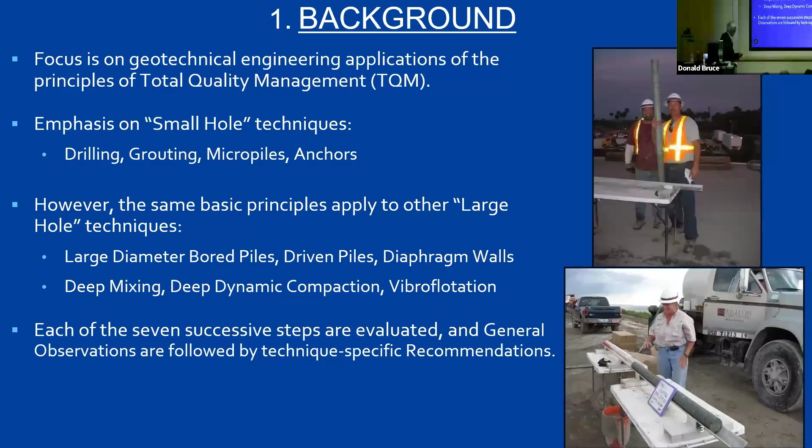That would be helpful. So what do we really mean by quality? Capital letters. Quality assurance and quality control is an integral part of every product, every project. And many of you here will have spent time in the field doing your tests and writing the results and all these things. That's one aspect of quality. But it's certainly not limited to that, important though it is. What quality really is synonymous with is ensuring that every successive phase of a project, God bless you, from concept to final performance verification, is focused on achieving the mutual goals of all the parties.

Again, going back to our Latin roots, the word contract comes from 2 Latin words, contrahere, which means to pull together. So a contract is a pulling together. But so often a contract is something that pushes us apart. So we have to try and change that attitude as well.

There are 2 fundamental aspects of TQM. Focused on optimizing every successive step or process. That's the key thing. It's all about the process. Because once something is built, like this clicker here, I can't inspect quality into it. What I can do is every step in the way of producing this is done to the highest standard of quality. And then the key thing, especially for the contractors, is to eliminate and avoid rework, i.e. do it right the first time. And that may sound very simple and very pedantic, but that is the essence of quality in the construction business.

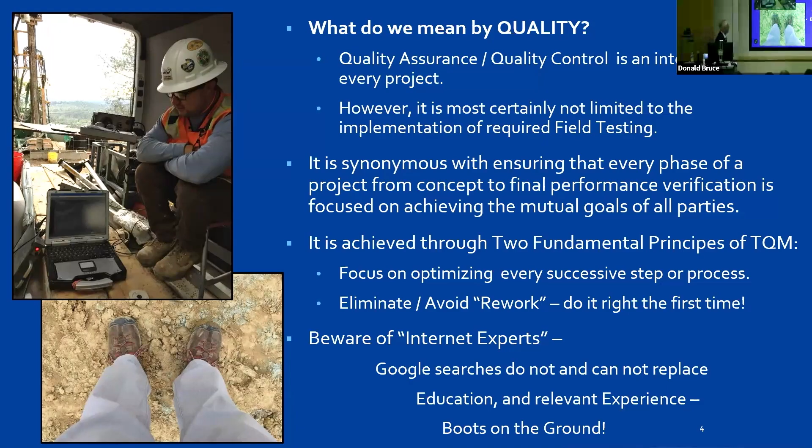That is essential. So let's start at the beginning, the design. Let's assume that we're all on a design team. General observations. Any design, it must be constructible.

That's the first rule of life. You can't design something that you can't build. It's got to be cost effective. Sure, it would be nice to diamond drill every hole on a micropile site, but you're never going to get the job to fly because it's going to be too expensive. So you have to be aware in your design of the cost implications.

It's always got to be compliant with the prevailing codes, standards, and recommendations. You can't just do this off your back. You have to have what we call a referenceable standard of care. That's to guide you in your work and then defend you if, God forbid, something were to go wrong. First attorney is going to say, so what code did you use in designing this bridge? And if you say, well, talk to the dog, and dog said, probably looked like this, that's not going to fly. So the designer must be experienced or extremely knowledgeable, preferably both, in the techniques that are being considered.

Very important. It's a bit chicken and egg, because you've got to get experience by doing a project the first time. But the way to do that is to do it under close supervision of your mentor or your professor. That's the way to get started on this. We have a process in our industry called internal and external peer review, either by an individual on the one hand or a panel of people on the other. And so when we develop the design initially, it's really important to run it past people who are independent of your design process. Now, they can be from within the organization or they can be from outside. But at this stage, it's a really important touchstone to have that peer review done.

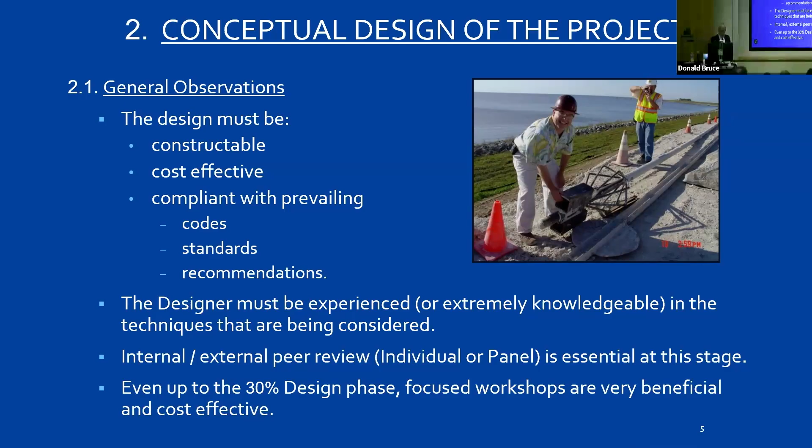And as you all know, a design progresses in stages. And a 30% design phase is typically very critical, because that's when really it's a go or a no-go, quite frankly. So at this point, industry finds that focused workshops are very beneficial. So you might have the designer, his supervisor, the owner, perhaps, and certainly the peer review together for a day or a week, going through the nuts and bolts of the design, just to make sure that it is relevant and cost effective. That is money very well spent.

So specific recommendations. Remember, that was a general commentary, and now we're going to look at individual techniques. So if we were together doing a drilling and grouting project, you'd look for, God bless you, the viability and the admissibility of the technique, i.e., are we allowed to do this kind of drilling in this area or this ground condition? Be very careful about specific ground conditions. I know here we have different ground conditions from elsewhere in the country in some areas, but there's also very difficult ground conditions. And of course, the best thing that's ever happened to dam engineers is karst. Karst is a really good thing for dam engineers, especially those involved in doing dam remediations.

This is excellent. And then we have restrictions imposed by, say, FERC and the Corps of Engineers and Reclamation on drilling in certain conditions. So, for example, you and I would never allow compressed air to be used drilling through an embankment dam or a levee, would we? Say no. Good. All right. Then we have to think about the practicalities of the issue. We are blessed in this country by having a tremendous number of excellent specialty geotechnical contractors, many of whom have direct links with European counterparts or Japanese counterparts. Just excellent.

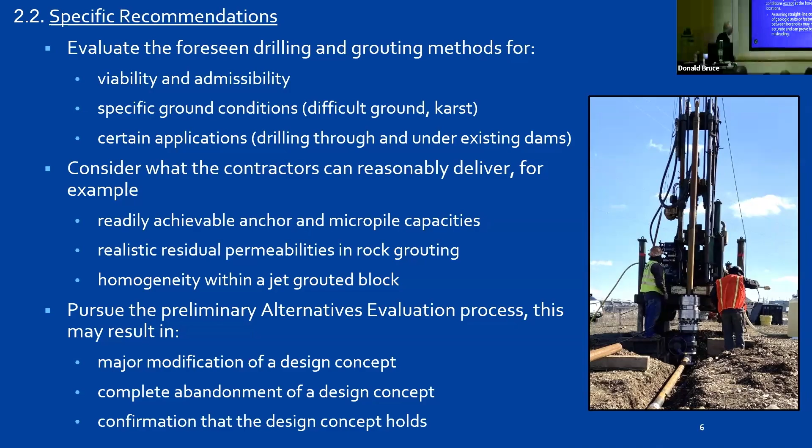And so it was a 1930s design that was commenced in 1940, suspended during the war, and then completed in the 50s. So this design was already 30 years old before it was built. Things had changed in that time. So the standard of care then was you excavated very carefully all these karstic features on which the dam was going to be built. And this was an embankment dam, fill dam. And so now what we do, of course, is to backfill with concrete. Then, having excavated all the soil, they then backfilled the karst with soil.

And Wolf Creek, terrible history of service, huge dam. But in 1968, it was almost lost. And if it had not been for emergency action by the drillers of the Corps of Engineers, this dam would have failed. And Lake Cumberland wouldn't be there just now, nor would whole bits of Nashville.

So the paradigms, for those of you young geotechnical engineers that are involved in this business, you've heard this 1,000 times, and I'm not exaggerating. There's never enough boreholes. They're in the wrong place, at the wrong orientation, because you always got to orientate the boreholes to intercept the fissures. If you've got vertical fissures in the ground, you put inclined holes in, right? If you put vertical holes through vertical fissure rock, you're not going to hit them. And of course, they're never deep enough.

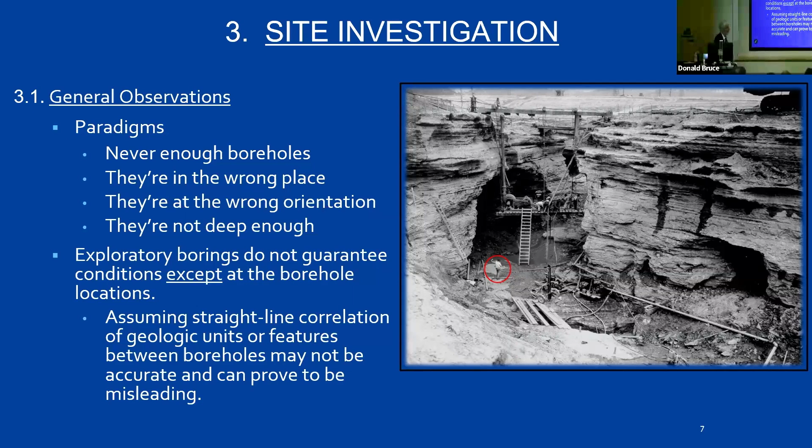So beware, and again, a little bit of word of warning to young engineers here is be careful in averaging values for parameters. So for example, if we're looking at in situ permeabilities in a rock mass, you might have 99% of the stages in the rock mass tight. There's no fissures there. But you might have 1% of the area that is extremely permeable. That's the key. That's where the seepage is going to occur. But if you were to average all these data, you're going to conclude that you've got a rock mass of extremely low permeability. And that's dangerous.

So you've got to look at the data in detail for what they are, spatially distributed as well as statistically distributed. The results of the site investigation, of course, as you well know, are the underpinning of the design. No site investigation data, no design.

They're the basis for determining what we call PFMs, and that stands for potential failure modes. So basically, it's all the ways that you can think about that this structure may fail. So if it's an embankment dam, it may be through overtopping, or it may be through backwards erosion through the soils or something like that. So the site investigation data inform you about the design potential failure modes.

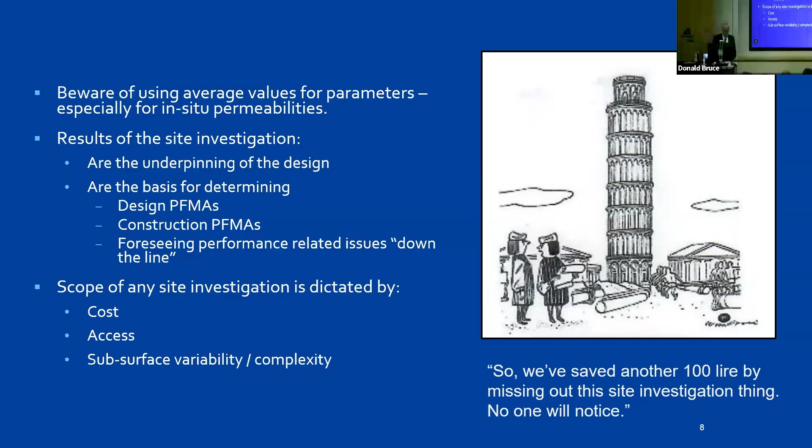So again, we have to look at the site investigation details in terms of the technique that we're using. So for example, the testing that we might need for the design of a soil anchor wall might be totally different from the testing that we might need for a micropile foundation or something like that. So again, it's got to be topic specific in terms of what we do.

Those of you involved in consultancy know this. The geotechnical data report is essential. That's just a compilation of all the site investigation that exists. A geotechnical interpretive report is also very useful. That's where you as a consultant will put an interpretation on those data as a guidance. But then there's a thing called a geotechnical baseline report, which is very common in large tunneling projects. And that's an excellent thing, but it is very legalistic and it carries contractual and financial implications. So be very careful if you have to produce a geotechnical baseline report.

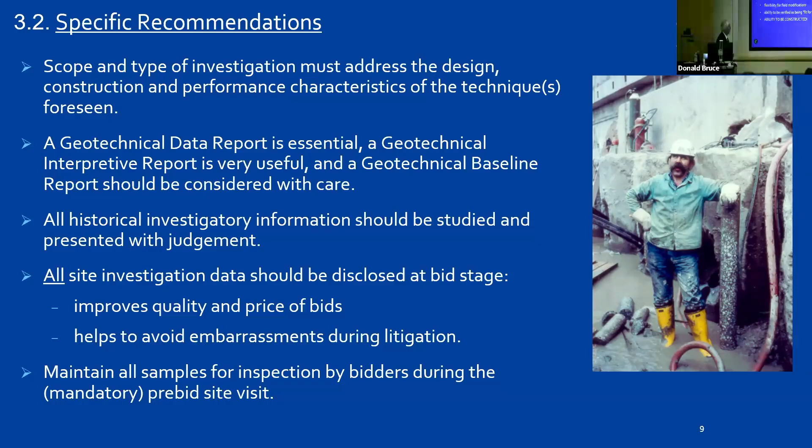So the next step, the third step, is the design, development, and the documentation. And these are the obvious requirements for a high quality design. It's got to address lots of things. It's got to be consistent with the site conditions. Talked about that. There's a link between the site and the design. It's got to be consistent with the project goals. Consistent with the most up-to-date codes. We come back to that again. Realities of cost and schedule again.

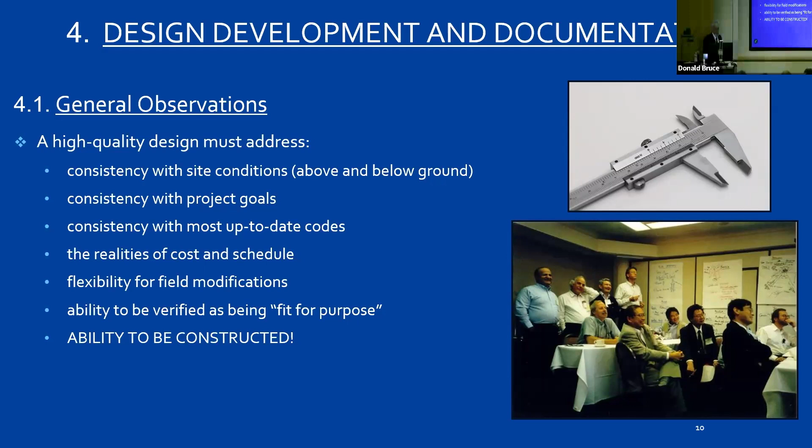Flexibility for field modification. No design, no specification is ever 100% watertight. There should always be scope for us as ground engineers to accept that there's going to be variability and change, and therefore the best documents have a trapdoor, if you like, to allow you to employ flexibility in the field as the project develops. Can you verify your design as being fit for purpose? Is it built in such a way that you can test it and verify it once it's done? And then again, big capital letters, it's got to be able to be constructed.

So therefore, if we look at specific recommendations, again, repetitious here, peer review is essential. And this is not, to supplement what I said before, just an independent numerical check on calculations, quantities, and dimensions. It's much more than that. It's a thorough review of the fundamentals of the design. Is this a sensible thing to do?

I also recommend that you should always share the design basis memoranda with the bidders. The more they understand what you're trying to design, the better they can serve you. Remember this conflict concept. Everybody should be pulling together instead of forcing apart. Clearly define acceptance criteria. What can be done if these are not met? So if you're playing a game of football, it's helpful to know where the goalposts are. To always know where you're playing.

Full-scale field trial. This is, again, devoted to the consultants amongst you. Every design is a risk to a certain extent. And therefore, to help manage your risk, you specify a full-scale field trial in advance. And this is where the contractor goes out with his foreseen means and methods and equipment and people, does a test area, which is then verified intensively. And only then should you allow that methodology to be employed in production.

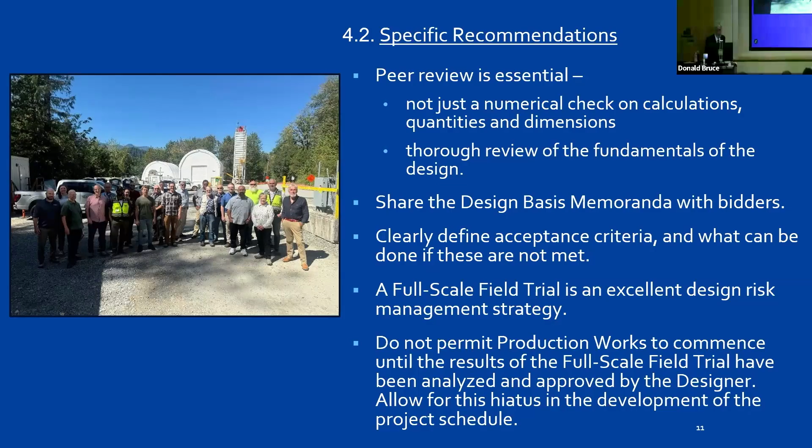So often we get to the stage where especially the subcontractor will say, look, I'm going to install this test program, and while you're analyzing this, at our own risk, we will go ahead and start production. And that's wrong. Shouldn't do that. You should always build in time in the project schedule that there's a break. There's a break between the conducting of the full-scale field trial and its analysis, on the one hand, and the commencement of the production work on the other.

Right, let's look at these infamous specifications. Again, an old joke photograph that somebody put together. It wasn't me. Anyway, general comments.

A high-quality specification, and for those of you younger colleagues here, specification is basically the plan or the instructions that you as the designer are giving to the potential bidders. You're telling them what to do, how to do it, to greater or lesser extent. It's essential, and I pick my words carefully here, to the successful and non-confrontational management and execution of a project. No one likes to be fighting in the field or in the lawyer's office afterwards, but the better the specification is, you're managing the risk of conflict down the road.

Now, the reverse is true. A lot of my time these days is spent doing peer reviews of specifications for different projects, and the reverse is true. If you've got a poor quality specification, you can always tell it's typically badly written. The grammar and the syntax are dreadful. Internally inconsistent. Different sections of the specification say different things. This is wrong. It's cobbled together. It's obvious that bits have been taken from previous specifications willy-nilly. It doesn't disclose an awareness of current codes and practices. And it's probably concocted by my famous internet experts. Yeah, they get everywhere, don't they?

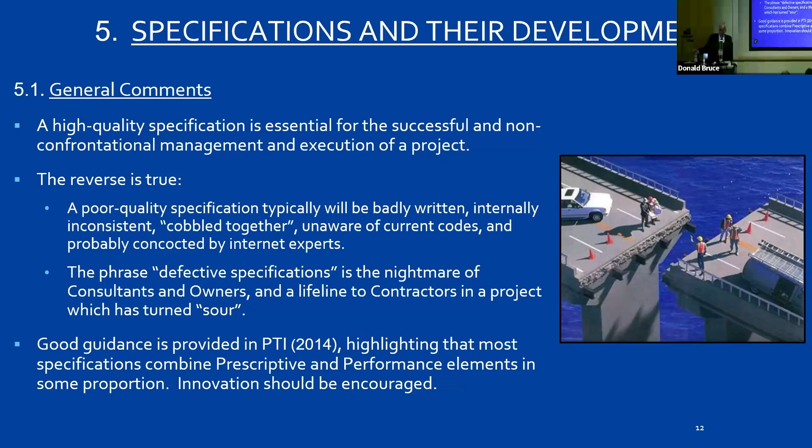Good specifications should always encourage innovation on the part of the contractor. And especially in ground engineering, we have very innovative contractors, as we've said. So why not engage the head of the contractor as well as the arms and the legs? It's a good idea. They know a lot about their business.

So specific recommendations, and I'm being now politically correct. Cherry has seen this photograph so many times. It's a photograph that I took in a drainage tunnel in Pakistan. It was so hot that this gentleman was drilling in his underpants. Well, he wasn't drilling in his underpants, you know what I mean? He was drilling wearing underpants. So for political correctness now, he's been X'd out. So

Specific recommendations for a good specification. Define the measures of success. Which goals are we playing into? Clear instruction as to what construction techniques are not to be used. So, for example, when I'm writing a specification for a drilling contractor, you're the specialist. You tell me how you're going to drill, but I tell you what, you're not going to be allowed to use air in my dam. So you're saying what's not permissible, but you encourage the expertise to be used elsewhere.

It's very important that the pre-qualification criteria for both the company and the individuals are made very clear and very rigid. And I'm very strong about this because you can see at the bottom here, the significance of this cannot be overstated. Because especially if the award is made on a low bid basis, you have to work with the people that are pre-qualified. They should not be relaxed because unqualified people will inevitably lead to inferior construction quality. It's as simple as that.

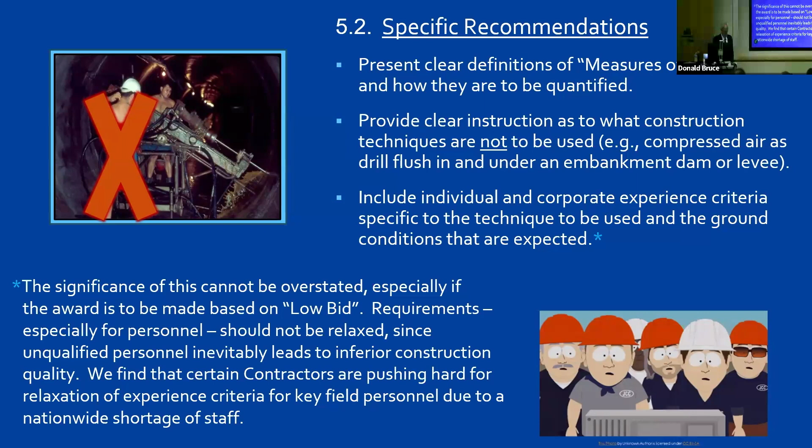Right, we're almost there. The fifth step of the 7 is contractor work plans. So let's assume that we've got the contractor on site, and in the specification, there are requirements for him or her providing a work plan. And this is basically a step-by-step method statement of how the company is going to build the job. And again, without being cynical, but just being completely accurate, sometimes you find that in developing these work plans, it's the first time that the contractor's really thought through how he's going to build the job. Easy to get the job, more difficult to build it. And there's a lot of things that at tender stage and bid stage, you'll say, I'll change the engineer's mind on that, or I'll get around that somehow. Nope, not going to happen. Got to think it through right from the start.

Those of you who get through to looking at specifications, a big clue about contractor work plans and method statements is when you look at the document, it will be very short on narrative, but long on data sheets and catalog cuts. This is absolutely symptomatic of a work plan that's been cobbled together.

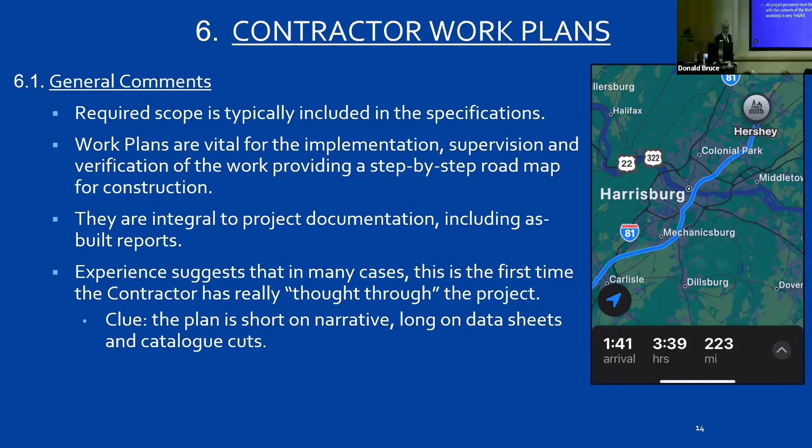So specific recommendations then, consider exchanging draft versions following discussions. So the contractor has a draft work plan for how he's going to drill, sits down with you as the engineer or the regulator, says, what do you think? And you get comments coming back. But at the same time, there's not going to be design by comment responsibility on the part of the reviewers. Everybody still has their own place. The responsibility for the work plan is still with the contractor, but he's engaged the other parties to get input before it goes final.

Likewise, there's always restrictions on how soon the contractor has to submit these work plans, and they're pretty rigid. But it's a little bit more flexible in terms of what the owner and the consultant have to do. So it's a moral obligation, as far as I'm concerned, moral responsibility, that the owner and the engineer review and return these plans as quickly as possible. Time is the only thing you don't get twice on a construction project. 28 days, 28-day unconfined compressive strength testing, it's a paradigm. 28 days is just 4 weeks.

All personnel must be acquainted and familiar with the contents of the work plan. And we always find that a pre-construction conference, just one day in the site office, something like that, work through the work plan so everybody knows, and especially the engineers, site representatives. How can they manage the contractor? How can they control and understand what the contractor is doing unless they understand what the contractor wants to do? So it's very important that everybody's literally, again, on the same page.

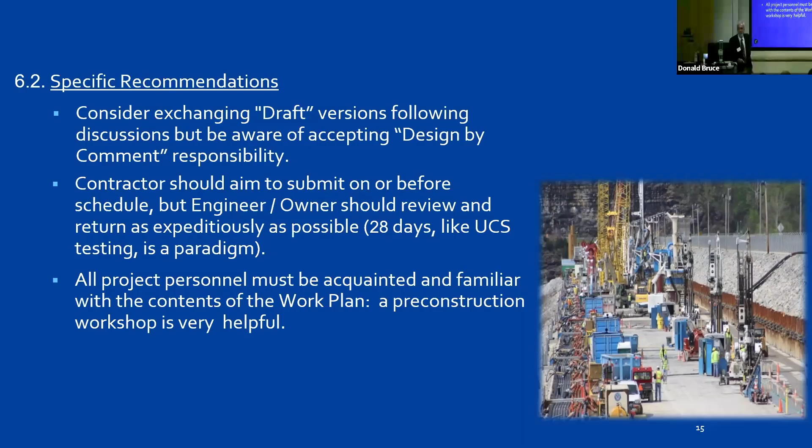This is a photograph taken at Wolf Creek at the height of the remediation. And here we are on the downstream side of the dam, building a huge concrete diaphragm wall because of the seepage through these karst features that we showed at the beginning. It's amazing what you can do for 350 million.

So, contractor construction records, and we're now step 6. So these are the records that should be maintained in real time, recording the work that's being done. The quality is reflected very simply in the completeness of these records, their accuracy, their clarity, and their timeliness. And basically we say, we want the records by close of play for what you've done today. There are other projects where they've been allowed just to sit, and at the end of the week, somebody just hands them over in a pile. That's not good enough. These records are fundamental to sharing information in real time.

Nowadays, of course, we're not only monitoring on-site, we're monitoring remotely what's happening. So this is very good. Got to track, got to assess the progress. Why? Well, they're the basis for interim payment. No records, no pay. Basis for prosecution and defense of claims. The attorneys will tell you that the party that has the best records wins. So therefore, you have to be as systematic and as complete in your record keeping on both sides of the ball as you possibly can.

And this is something we've seen on the big Corps of Engineers projects recently, that on the large projects, you're handling literally thousands of pieces of information a day on these complex projects. And it's a data management system, as you can see here. And most times, 9 times out of 10, I would think that everybody underestimates the effort that goes into producing and running a system like that.

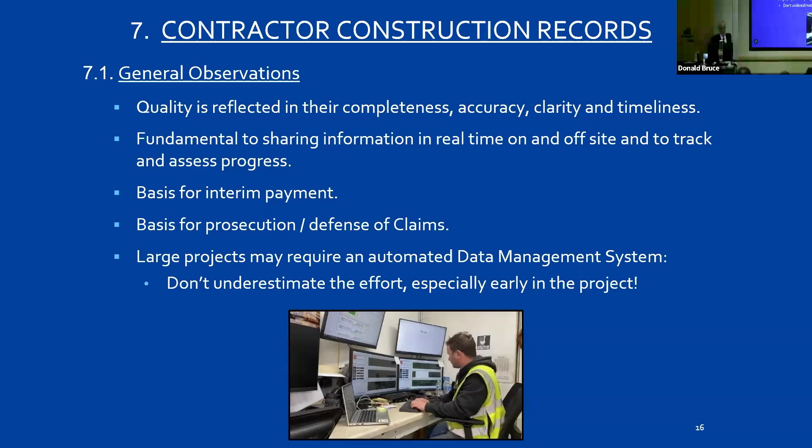At Wolf Creek, we had 35 people in the data management center working. Corps had the same number on the other side of the ball. And it was essential. They weren't just sitting around trying to list the 5 things they'd done last week. They were working their little buns off all the time. So don't underestimate that. And you can't afford to get behind, because once you do, it's very difficult to catch up. So specific recommendations.

And this is what a good data management center would look like. This is the one at Center Hill. We're not just in little air-conditioned cabins anymore. We're in proper, realistic offices with people wearing shirts and swept floors and things like that. So this is good.

So my colleagues, Dr. Callie and Professor Jefferis, developed this 10-point plan that's in the Deep Mixing Conference in Poland from a couple of years ago. The common theme through all these things, again, comes down to cooperation at all levels and the use of properly qualified personnel. So I think by now you're beginning to see how the threads are reinforcing and coming together. Special attention should be paid to quick and conclusive resolution of apparent discrepancies and omissions. Don't let things fester. Get it done. Just, I hate to say this, grab the bull by the horns and just get it done.

Most of these big jobs are now conducted under what's called a partnering agreement, whereby the different companies agree at the beginning of the job. Partnering is not contractual, but you agree to have an issue resolution process. And the whole key to it is trying to solve at the lowest level first and only elevate things that, say, the field engineers can't deal with. And that's partnering at its best form. But the more you can take care of early on, person to person in the field, the better.

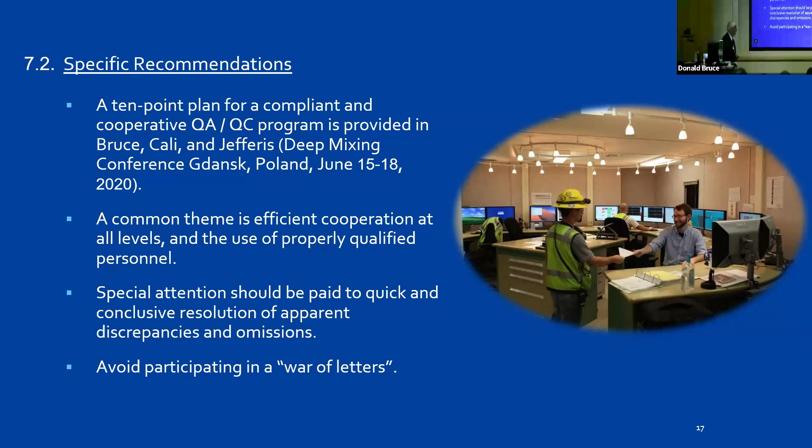And absolutely categorically avoid participating in a war of letters. You don't want to do that. You want to try and discuss it, work it out before you go into print. Because everything that is documented for that project is discoverable and will be produced if there's a dispute. So be terribly careful what you say. And that goes as far as electronic records as well.

So, performance verification. And I think this is the last of the major steps. And we're doing fine. This is a lovely photograph of the cutoff wall being constructed at Herbert Hoover Dike in Florida. It's the hole in the middle of Florida. And since 2006, we've built tens of miles of cutoff wall around Okeechobee for the seepage problem.

Very interesting project. And this particular machine here is called the TRD, the Trench Remixing Deep. And it's just like a giant chainsaw. And it spins and it's dragged through the ground and it mixes the soil with the cement in place. It's a fantastic technique. De Wind has a similar system called One Pass.

And it really is a very economic way of building cutoff walls in soil. So let's go back to the beginning. Remember TQM. After the product is built, you can't inspect quality into it. But by using successive processes of the highest practical quality, you're going to be able to come up with a high quality product. But there is a difference between process optimization and product verification and acceptance.

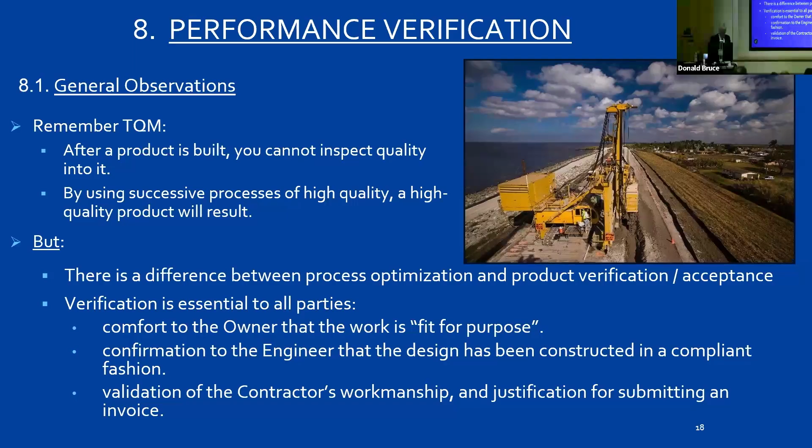And verification is essential to all parties. For the owner, you're getting comfort that the work is fit for purpose. You're verifying that your cutoff wall is working or your anchors are working, something like that. It's confirmation to the engineer, the designer, that his design is being constructed in a compliant fashion. And finally, it's validation of the contractor's workmanship and a justification for submitting an invoice. These are very important things. So verification, performance verification is a fundamental thing.

And then we have specific recommendations. So just for a few of the techniques that I'm involved with, for example, pre-stressed anchors, which are used for tying back retaining walls, stabilizing dams, and so on. Our guiding light is Post-Tensioning Institute 2014, and it lays out how to design, construct, and test anchors. And so we have two different kinds of tests, a performance test and a proof test. And the way I always remember it is performance is a big word, it's a long test. Proof is a short word, it's a short test.

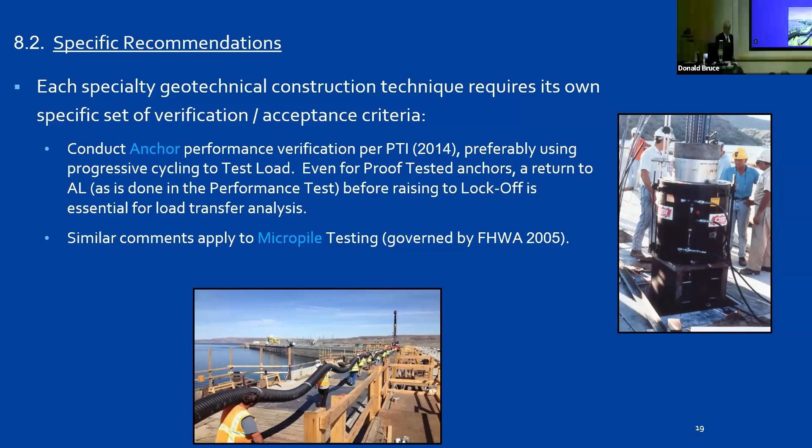Very simple. And one of the key things there is to return the lock-off load to the alignment load before going back up to lock-off load. And that's simply because the total extension of the anchor is both an elastic extension and a permanent movement. But when you do your PL over AE calculation, you're based on elastic extension. So the only way you can get the elastic extension is to deduct the permanent. And that's why you go back to AL. Very simple. Similar comments apply to micropile testing, and that's governed by the recommendations of 2005, Federal Highways, good document, still in business.

Grout curtains, judged acceptable in the short term by confirming that the target residual permeability has been met. We do that by water testing in situ. And here we've got the 5 Lugeons or less as a good criterion. If we're looking longer term, how do we know if a grout curtain is working? Well, we look at the piezometers. We look at the seepage rates, if we can do that. We look at other measures of success. For example, a sign of distress on Wolf Creek Dam, sinkholes developing on the downstream face, muddy flows coming through the roof. I mean, this is a sign that you've got a major problem, Houston. You've got to be careful with that.

And jet grouting is verified by the consistency of the process. And what do I mean by that? Well, when you're jet grouting, it's automatically controlled and monitored and displayed in real time in terms of pressure and volume, rate of rotation, rate of grout injection, and so on. So we check on the consistency of that information.

The best thing, of course, is exposure in the field. And lower right-hand corner is a dam that we worked on in Kansas some years ago. And these were test columns. And these test columns were anywhere from 5 to 10 feet in diameter. So it's like walking through the petrified forest, once these things have been excavated. That's the best thing. If you can excavate and look and take samples and so on, that's much better than doing something a little bit more arbitrary or extreme.

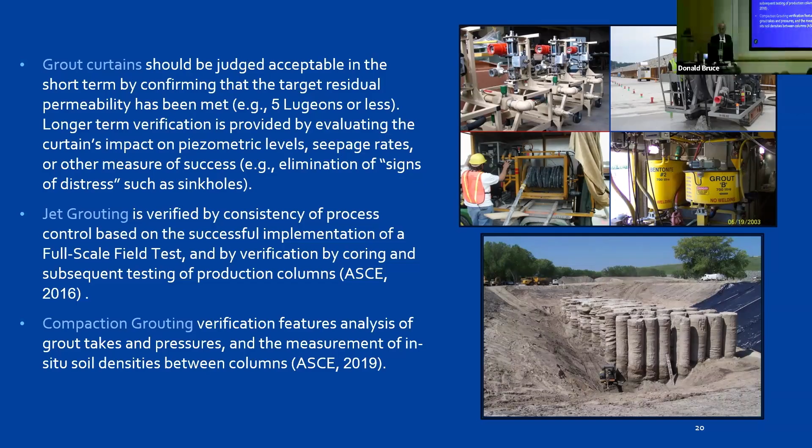All right, so here we go. Quality, just to sum up, is not just limited to QA/QC field testing. I think we got that message across, okay? Quality must permeate each and every successive process, from concept to construction to verification. You've got to be good at everything. Quality will result in budget and schedule benefits, but will also contribute to the enjoyment and the pride of all the parties who participated in completing successful projects.

We all have so-called favorite projects that we've worked on over the years. And you ask yourself, why were they successful? Why did you like the job? Because everybody got along. We did a quality project, a quality result. Everybody walked away happy. So I think that that's what quality really means. And I hope that Chief Petty Officer, U.S. Navy, but later Professor Rees, would agree. It's all about the people. Quality starts and finishes with people like yourselves.